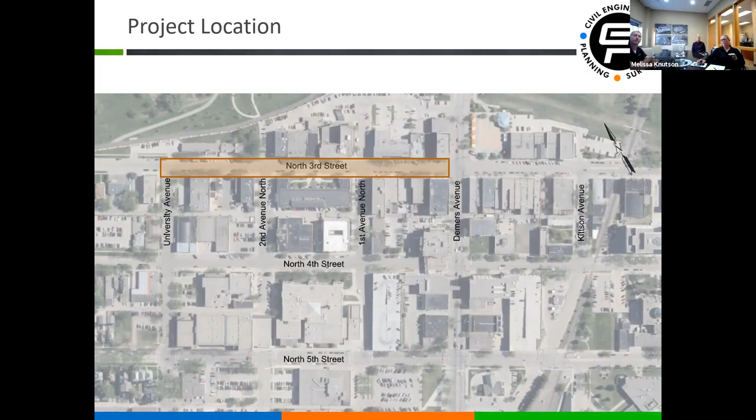The project is being developed to correct existing deficiencies along the project corridor. Some of those are obvious to those who walk down the street and some are not. The pavement that exists today is aging. It was reconstructed back in 1933. Right now there's about 5 inches of concrete pavement out there that has a base underneath, and the thickness of that base is not known. That concrete was overlaid with asphalt later on, back in the 90s. But it's been a while since there's been major construction on this stretch of road, and so it is exhibiting deterioration.

Most of those distresses that are evident in the pavement include the joints from the concrete pavement reflecting up through the asphalt. There are other cracks that are not along those concrete joints that are present out there. And that, combined with some of the bumps and sags in the pavement and the patching that's been done on the pavement over time, all contribute to a deterioration in the ride quality of the road.

And so the project is necessary to improve that aging infrastructure. Pavement deteriorates at an exponential rate as it gets older, and so staying ahead of that is essential to having good facilities in town and maintaining the connectivity in our transportation system.

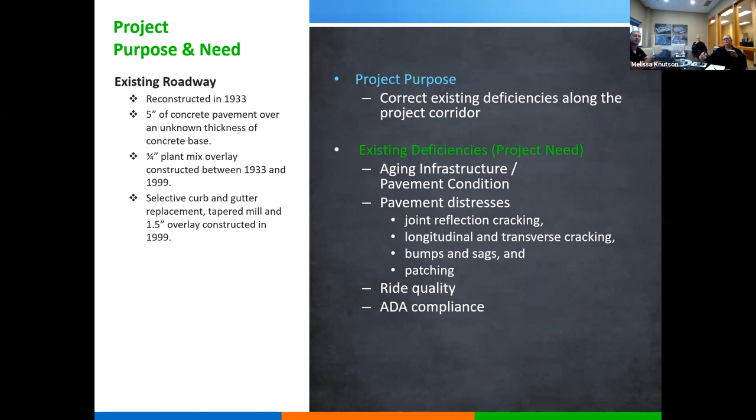We also want to address ADA compliance along the project corridor and make some improvements to the accessible pedestrian facilities along 3rd Street. The project is being facilitated by the City of Grand Forks and administered through the North Dakota Department of Transportation local government.

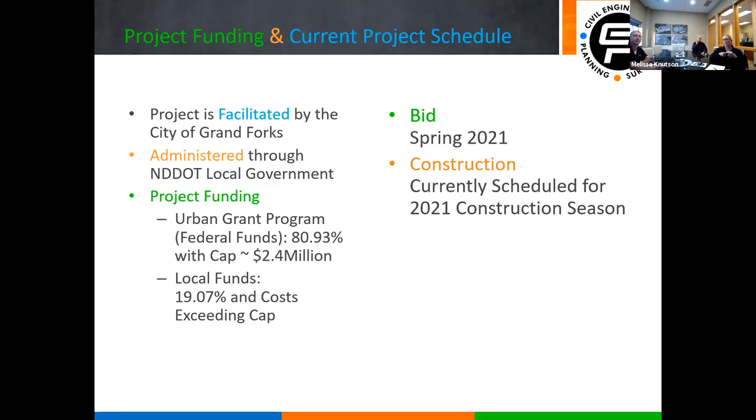It'll be funded generally with about 80.93% urban grant program funds. However, there is a cap on those funds at $2.4 million, and the remaining costs will be paid with local funds. It's currently scheduled to be bid in the spring of 2021, with construction to begin and be completed in the 2021 construction season.

The proposed improvements will obviously include roadway reconstruction, and along with that, some curb extensions, which are commonly referred to as bump outs, as you saw on the DeMers Avenue project recently. Improvements to the ADA facilities, new street lighting, and also a number of streetscape features, which we'll discuss in more detail here shortly.

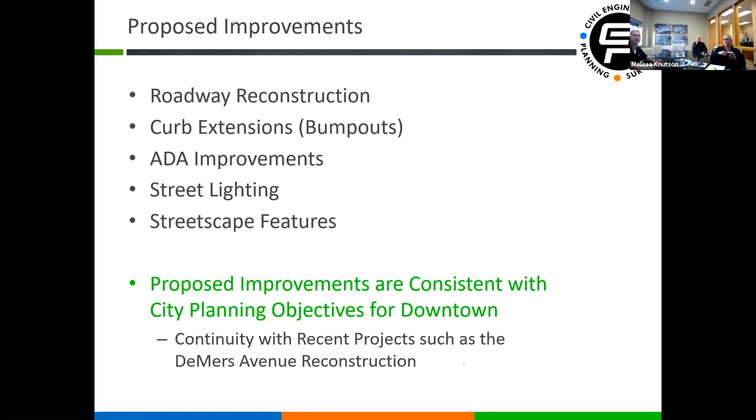And the big thing with the streetscape features is that those proposed improvements are really consistent with the City of Grand Forks' planning objectives for the downtown area, and they tie in nicely with the recent projects like the DeMers Avenue reconstruction.

Again, we'll describe these features in a little more detail, but we have prepared a rendering of what these features may look like once the project is constructed. So here you have a rather bird's eye view of if you were hovering above DeMers Avenue and looking down toward Gateway Drive.

Some of these features may move slightly or change slightly, but the base geometric alternative that we're looking at has this approximate configuration, and you can see some of the streetscaping features, the street lights, things like that. So this is what we anticipate would be a rough appearance after the project was constructed, depending on the alternative selected.

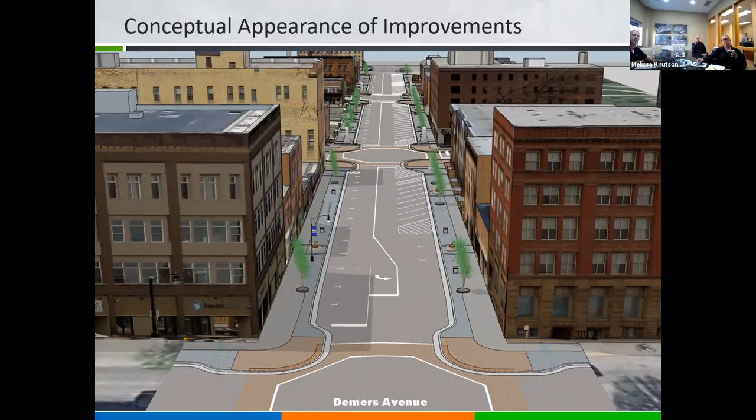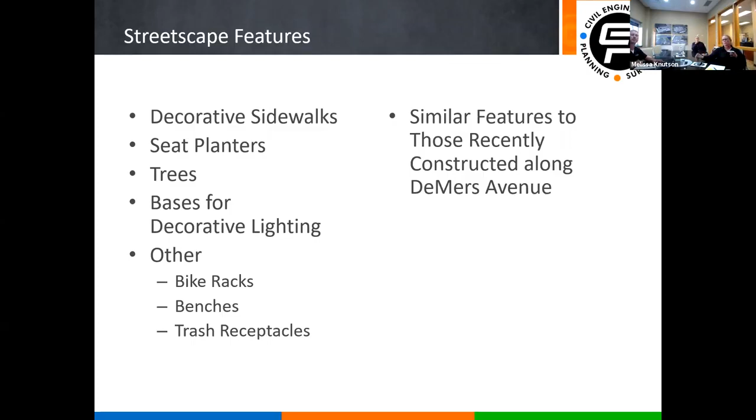Getting back to the streetscape features in detail, what those would include would be decorative sidewalks, seat planters, which would be planting beds that are raised up and have a concrete perimeter on them that can be used as a seating area for downtown residents and visitors, bases for future decorative lighting, and other functional things such as bike racks, benches, garbage cans, recycling bins, and those features would be similar to those recently constructed on DeMers.

And these photos that are coming up in the slides here are photos of the actual features that were constructed on DeMers Avenue. So here you see the decorative sidewalk, which includes different colored pavers. And those pavers are all the way from the curb to the existing buildings, as they would be on this project. This is an example of what the seat planter would look like.

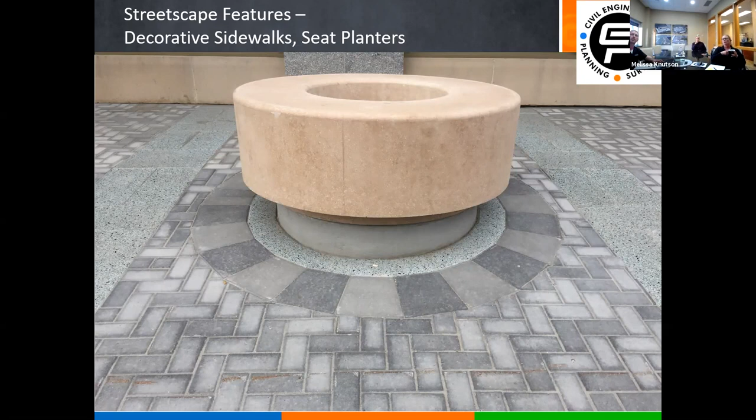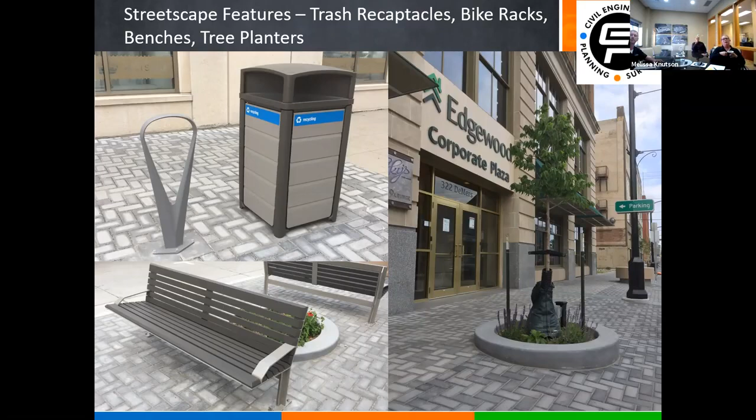This was taken at a time when the growing season was not active, but if you can envision, there would be some low flowering plants in the middle of this, and quite attractive feature. Again, some other decorative features would include planters around the new trees that would be planted downtown, and some benches and some lower planting areas, bicycle racks, and again, features that tie in with that look.

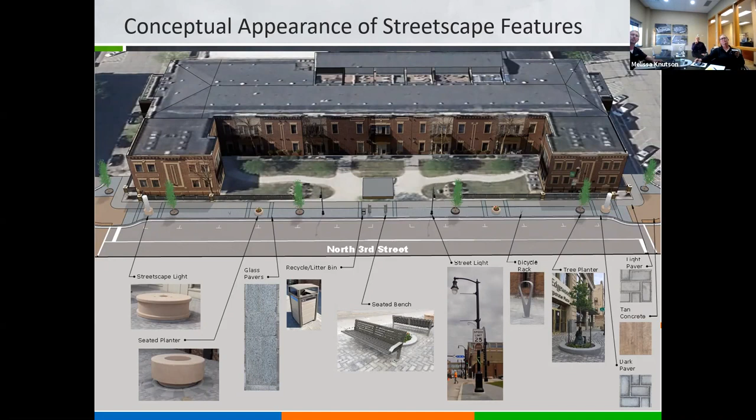Some of the impacts that we anticipate this project might have are mostly temporary in nature. Any construction project, of course, is going to have temporary impacts to vehicle, pedestrian, and bicycle routes. There will be detours in place for those during the construction. We are going to further discuss the pedestrian routes a little later in the presentation, specifically as relates to business access.

Another potential impact is tree replacement. However, we have consulted forestry specialists in that regard, and we have determined that the existing trees in the downtown area are reaching the end of their healthy, useful life. And those foresters have recommended and agree with the recommendation that's made to replace those trees.

There are also some historical resources downtown and cultural resources. We are in a historic district downtown, and so we are going to protect those resources in place with things like limited vibration to limit effects on the adjacent buildings and other items.

There was a question posed in the chat that on DeMers there were tracks that were found, and may they be here as well? And the answer to that is it's entirely possible. There is the old depot here, of course. However, we have done some research, and there are some old construction drawings that exist that show that those tracks were there but have since been removed. So we anticipate, based on that, that they are already gone. However, we will be watching for those, and we'll be dealing with the appropriate authorities in that regard if we do encounter something like that during construction.

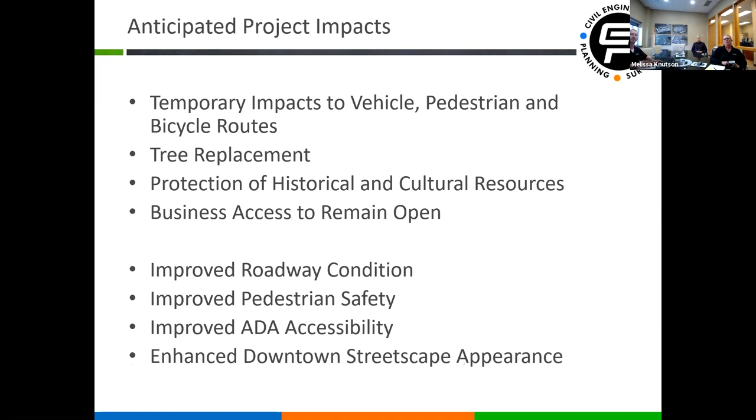And following the project construction, we do anticipate positive impacts as well, such as improved roadway condition, enhanced pedestrian safety and ADA accessibility, and also the enhanced downtown streetscape appearance.

And so we do anticipate that those entrances will remain open. You may have to be on one side of the street or the other. And again, there will be a temporary impact when the sidewalk right in front of a business is worked on. However, we are going to make every effort to minimize those impacts.

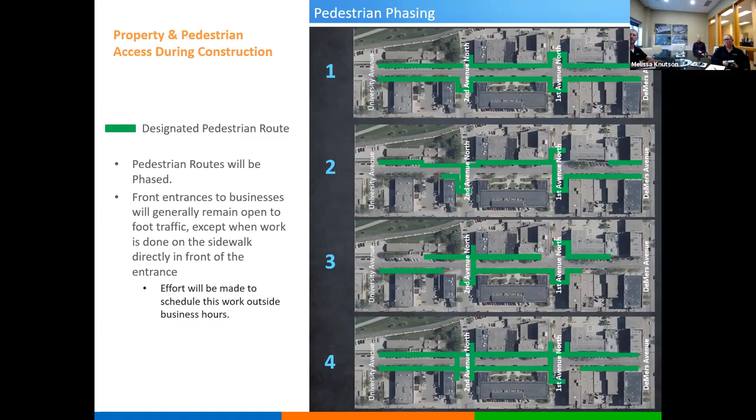The current geometric alternatives under consideration included various configurations of driving lanes. How wide would the driving lanes be? Parking lanes, what type of parking would be included? Would it be diagonal parking? Would it be parallel parking? Would we include bike lanes along the roadway, or sharrows where the bicycles and the vehicles have a wider lane to share between them? And also, how wide would the sidewalks and boulevards be?

And to explain the difference between a sidewalk and boulevard, the sidewalk and boulevard is the area between the road, so behind the curb, and the building. And the sidewalk, for our purposes of this discussion, is going to refer to the area that is graded to be ADA accessible. So the boulevard would be the remaining area that may be of a little greater slope than allowed by ADA, but is still available for things like street lights, site furnishings, and some of those decorative features.

The first layout that we will discuss today is what we're going to call the basis layout. And the only reason that we call it that is because when we compare the pros and cons of the alternatives, this will be the basis for comparison. And the reason for that is it's pretty similar to what exists today. It'll have diagonal parking on one side of the road and parallel parking on the other side of the road. And the driving lanes, parking lanes, the widths of those will be governed by standard, and the remaining area will be used for boulevard and sidewalk area.

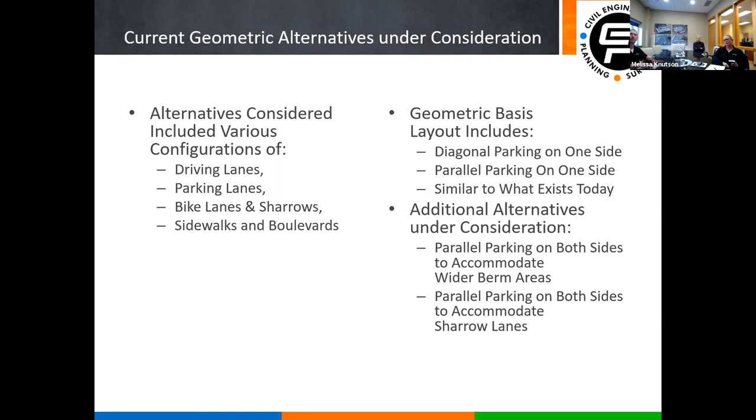Additional alternatives on top of that both include changing that diagonal parking on one side to parallel parking so that both sides of the road would have parallel parking. And one of those options would include a wider berm area, and the other would include sharrow lanes, and also a little bit wider berm area, but the widening of the available space would be more to accommodate the bicycle facility.

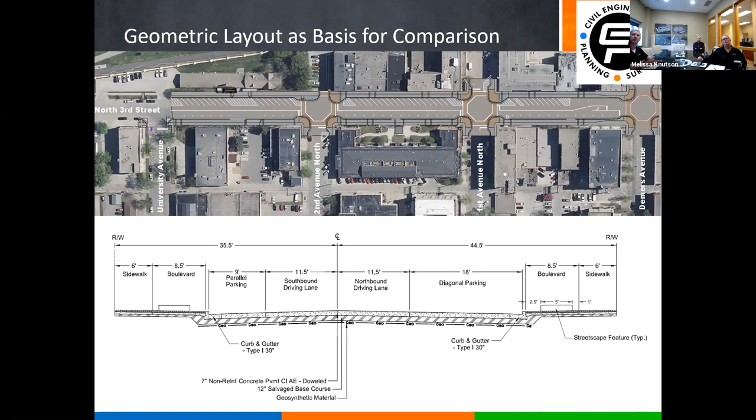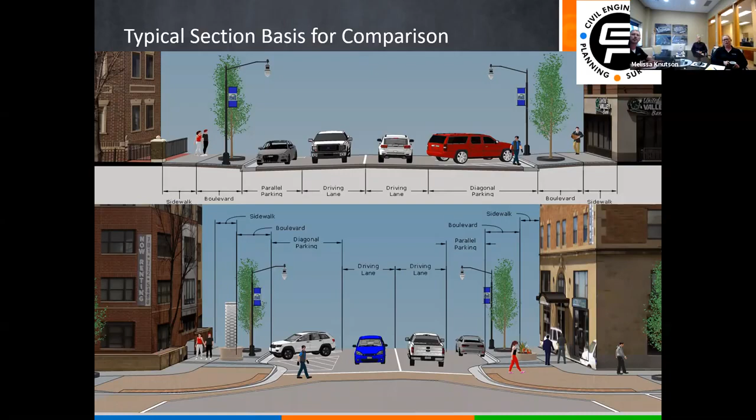The bottom figure here demonstrates what this would look like at the intersections where the curb extensions or bump outs are located. So you can see there again where the walking areas would be and how those features would fit in.

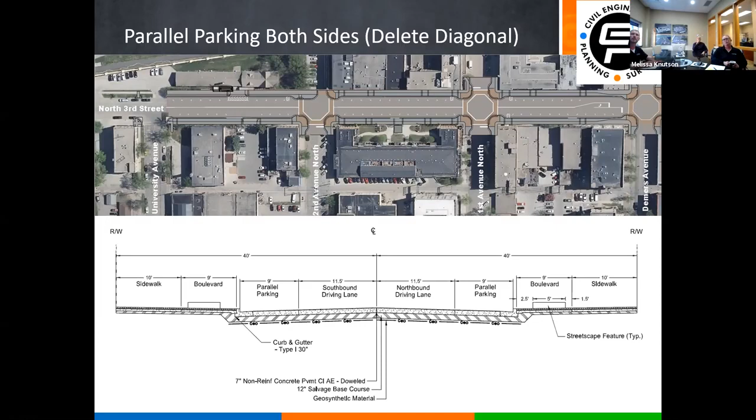So if we got rid of the diagonal parking on the one side of the road and went to parallel parking on both sides, you gain actually quite a bit of space because that dimension goes from 18 feet down to 9 feet for the parallel parking versus the diagonal parking. And so this alternative here, we have taken that available space and moved it into the berm area, so the boulevard and the sidewalk. And you see that our sidewalk has now increased to 10 feet in width with a 9-foot boulevard. Other than that, the dimensions of the bump outs, everything like that stays the same.

The other alternative that was considered is, again, changing the diagonal parking to parallel parking, but with the available width that results, some of that was implemented in the driving lanes to make them into Sharrow lanes, so shared vehicle and bicycle lanes. And instead of 11.5 feet, those lanes now become 14 feet wide each. And then the remaining 2 feet on each side was distributed back into the sidewalk area.

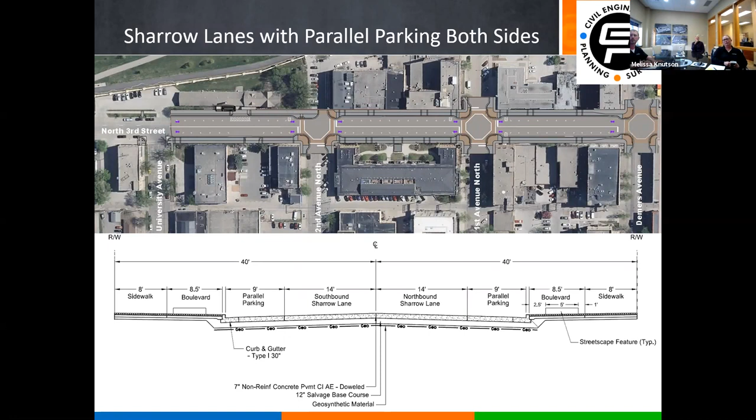So you can see in the geometric layout on the top of this slide that, again, the roadway itself gets a little narrower. The berm area gets a little wider, and most of that space is taken up in the driving lane area.

So the first question downtown that pops up a lot is, well, how much parking is there going to be? And because of that, we've provided this slide for consideration today. It's important to note that even on the basis layout, we will lose a few parking stalls from what exists today. Out in the project area today, there are 88 parking stalls, and 8 of those are lost by adding the bump outs to the intersection. So basically 1 at each quadrant of each intersection in the middle. And then another 4 are lost due to ADA considerations and other geometric modifications. So that leaves us with 74 parking stalls.

Changing the diagonal parking to parallel parking, we lose about another 16 parking stalls, bringing us down to a total of 58 within the project area. We did discuss already the driving lane, but the other summary information that's provided here is again the change to the boulevard and sidewalk areas. So what you see here in the table is the total width behind the curb, and that would include the boulevard and the sidewalk together. So how much room is there between the building and the road, essentially, is that dimension.

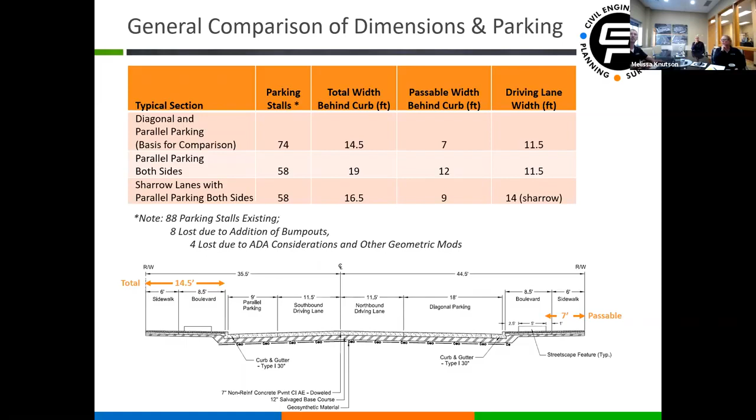And also the passable width behind the curb. And that's not necessarily the sidewalk or the ADA area, but it's the width between the building and where any potential obstructions in the walkway would be. And so you can see here that in the beginning we have a 6-foot sidewalk, but 7 feet is passable before we may run into some of those decorative features. And going to parallel parking on both sides with the wider berm gives us an additional 5 feet of passable area. And doing the Sharrows and putting a little bit extra on the berm areas gives us about an additional 2 feet of passable area.

Some other general pros and cons between the alternatives currently under consideration. We did talk about the widths of the berms, but the parallel parking as opposed to diagonal parking does give better pedestrian visibility at the crosswalks because the vehicles don't stick out as far. And so when a pedestrian approaches the roadway, they can see past those cars much more easily, and also the cars traveling can see those pedestrians sooner. So there is that gain.

Another benefit of the Sharrow lane option is that the current bicycle network has a route from University Avenue to the Greenway. So it goes from University Avenue to 2nd Avenue and then on to the Greenway. And this would extend that bike route over to DeMers Avenue. As far as cons compared to the basis layout, both of the other alternatives have fewer parking spaces.

With the parallel parking on both sides and the wider berms, we feel that there will be the greater potential for bikes to use the sidewalks. That is currently not allowed by city ordinance, but you do see it quite a bit by people who either don't know or just are in a hurry and want to go where they want to go. So having that wider sidewalk area does encourage the potential for that. And there is a potential hazard there; for example, if somebody's coming out of a business and a bicycle is coming down the sidewalk, they can run into that door and cause injury to one or the other person.

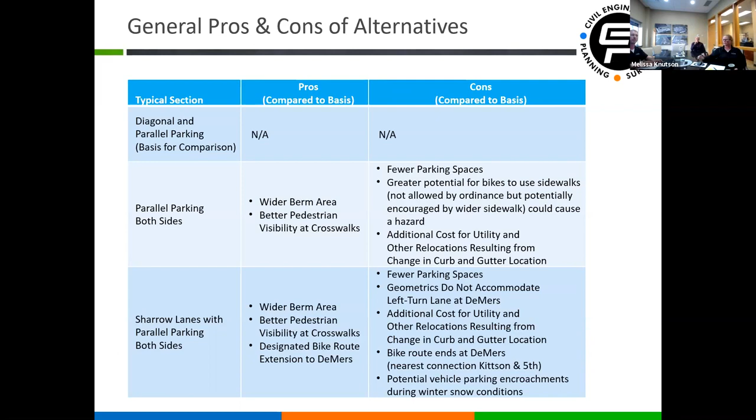And so with that, that concludes our general presentation. And we do have a couple of comments that have come in on the chat. So just for reference purposes, we do have a slide in case we need to point at something here. We can also go back to some of the other slides in the presentation.

But the first question we have is from Kristen Sperry, and it says, is there a historic preservation committee in Grand Forks? Have they reviewed the proposed streetscape in historic areas? So the answer to that is there is a historical society, and they will be reviewing that. We are currently waiting on the cultural resource inventory because we hope to share that information at the same time. So we definitely do want to get that input from the local historic society. And there also is, again, the Historic Preservation District downtown. So we definitely are aware of that.

Another chat question that comes in is from James. Question is, how much would the upgrades on the roads limit parking, or will it be the same? So in regards to that question, again, the base layout would decrease parking from 88 parking stalls down to 74. And if we went to parallel parking on both sides, we'd be down to 58 stalls.

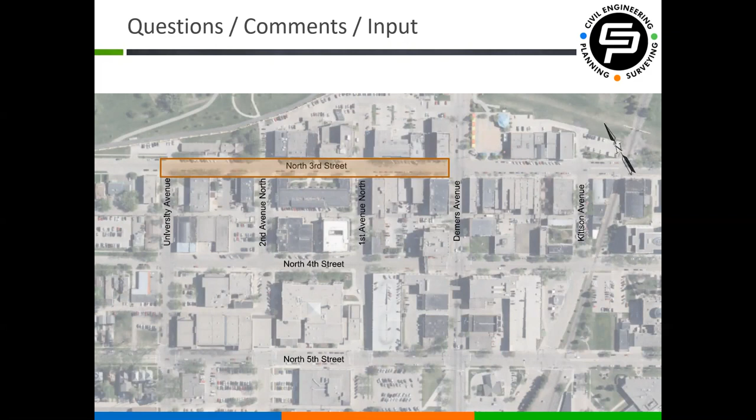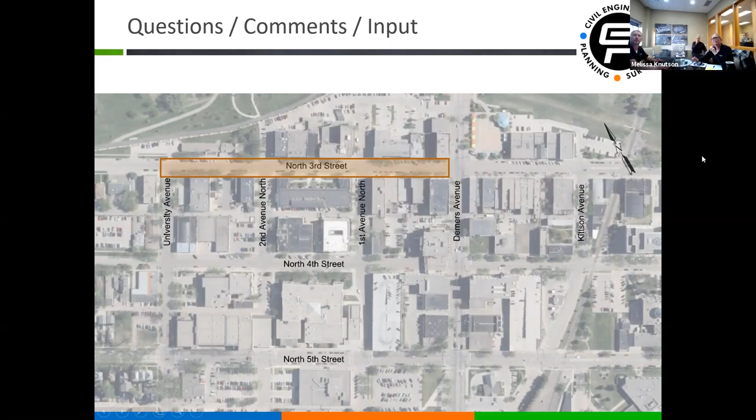All right. I don't see any other questions coming in on the group chat. Does anyone have any other questions that they'd like to ask verbally? All right. If not, that was the extent of the prepared presentation today, but we do want to remind everybody that this isn't the end of the opportunity to provide input. You can always provide input. However, the comment period to get your comments on the project record will remain open until July 8th, 2020.

Or if you'd like, you can request a comment form either by emailing me or calling me at 701-746-7459. So again, we look forward to hearing anything that you may think of later on in those forms, and you can certainly email with questions as well. Be happy to address those as they come in.